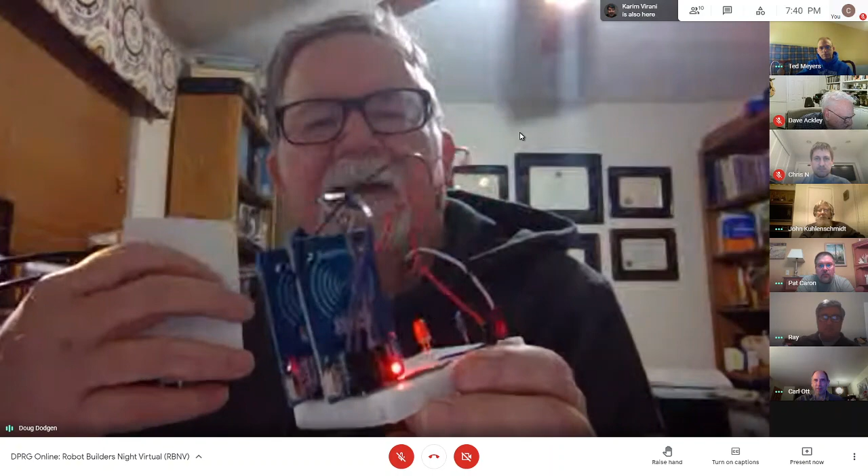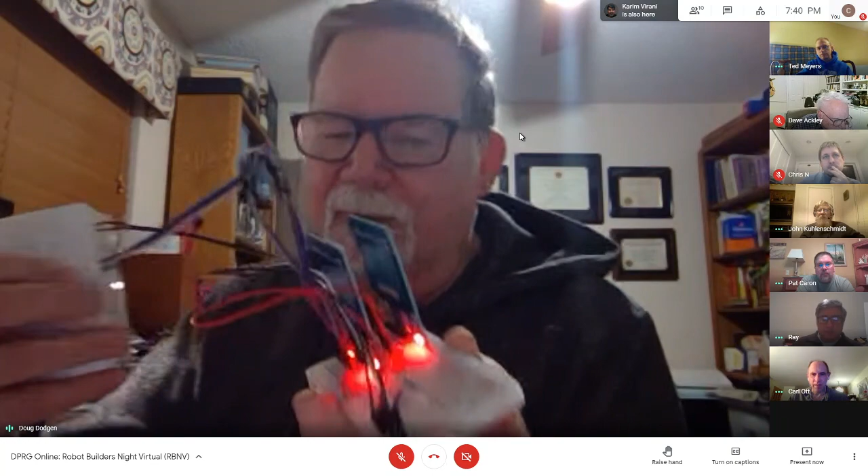Lead the way. Okay, well, I've been involved in a couple of projects this week. One is I've hooked up my Raspberry Pi to these RFID readers. I've got two of them in there, that's why it looks that way. I was checking to see if the one Pi could handle multiple readers, and it can. We're trying to come up with something for work with these. So you take these little dongles here, you touch them up to there, and you get to read. It's sort of like door openers if you've had that where you work. And so that's been an interesting thing. I broke it because I accidentally rewired something wrong, and I thought, oh my God, I can't get this to work. And then I got it wired back up, traced it down, found my wiring difficulty, and got it working again. So that was cool.

And the other thing I had to talk about is, let me present now real quick. I sent this document to the mail list, which was my first stab at command syntax for remote robot commands, what they send, what they ask for. So if you're in that mailing group, you will have seen that in the last day or so.

And last thing is Murray's not here, but thanks, Murray. I was looking at your code and it had really good examples of Python classes. Since I'm a Python neophyte, I'm trying to start writing some classes. So good examples, kudos. We'll tell you how we liked it when you get here. That's about it for me.

Unless somebody's got some questions about that. Is that more Python, kind of a combination of C and Python, or classes a traditional part of Python?

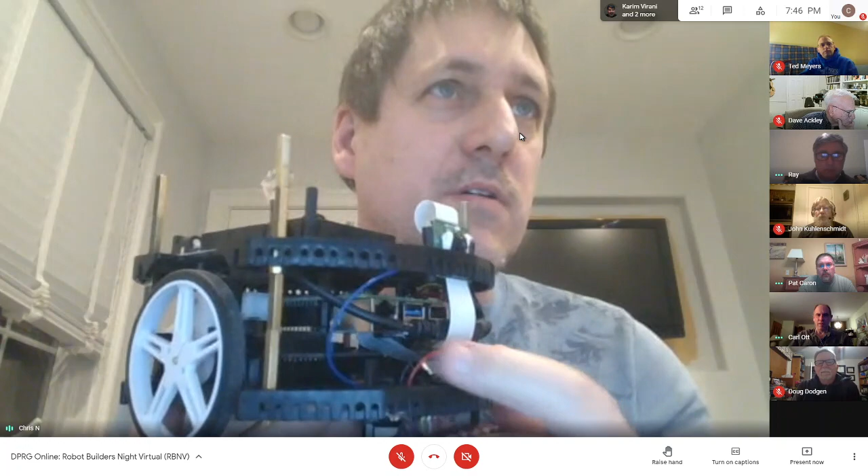So because Doug mentioned the document, I guess a couple comments on the telepresence robot. So one thing I did is I hooked up the Raspberry Pi camera to my Romi platform. You can see the ribbon cable. It kind of works out luckily in terms of where all the ribbon cable needs to go. You can see the Raspberry Pi is upside down in the Romi platform, but it all works out. Make a couple cuts in the Romi platform, so it's just sitting sort of halfway inside this upper deck here, inside a cut. So nothing fancy here.

So I did that so that I can tinker around with some video streaming, which many years ago I did on the Raspberry Pi, and I tried as best as I could to get some low latency video streaming going. So I dug up some of my old notes and tried some of those things, and then I tried a few other things. So I tried two approaches, mainly from the perspective of what kind of performance I can get. The question I'm trying to answer is, is it feasible to do interactive real-time control of the robot? Or are the latencies so much that it's just not going to work? That is the question I'm trying to answer.

And we know there's a lot of different ways to go about it. So the first way I tried is just really no frills, not using any particular framework, but just basically an SSH tunnel to connect my Raspberry Pi to the internet. For those of you who haven't done that before, it's kind of a useful thing to do sometimes. Let me just illustrate that real briefly. If I share my other screen. So ignore the left thing here for the moment. So what I've done on the Raspberry Pi, if you don't mind me scrolling up here for a second.

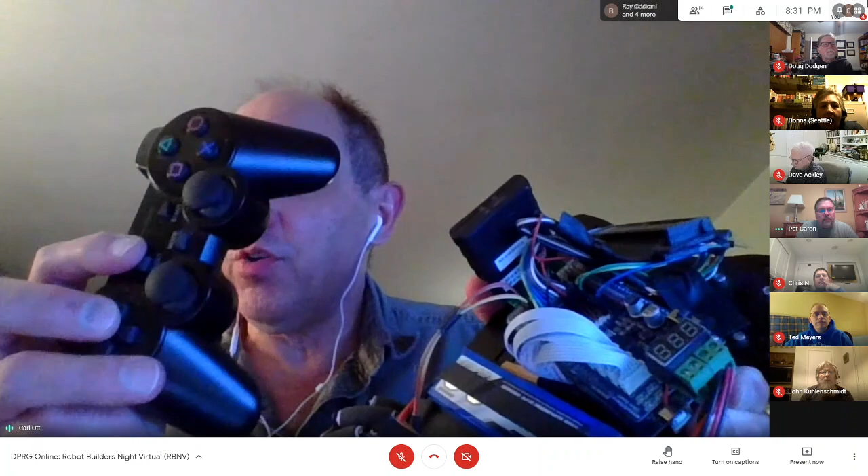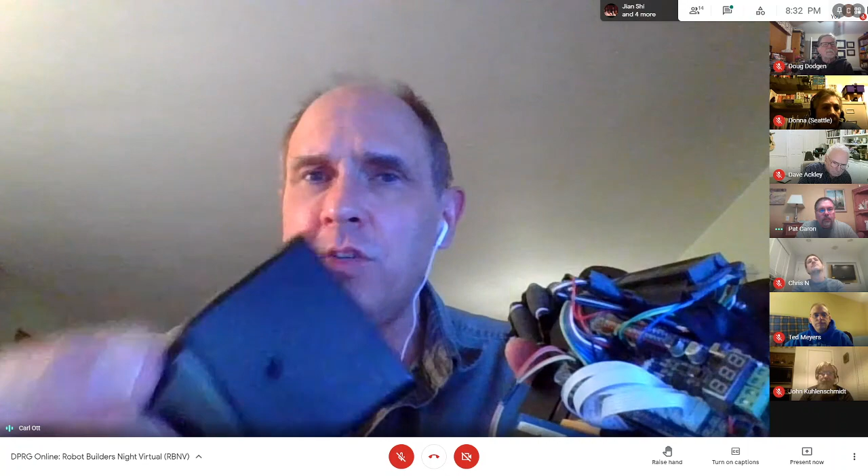Yes, so it's a PS2, right? Yeah. Now I've tended to buy them from Lynxmotion. Okay. They're a little more expensive, but they seem to be a little more robustly made than the cheap knockoffs you can get off of Alibaba. But they come with a PS2 dongle, and it's like $25.

You get the dongle, the interface card, and this guy. And I did have to spend some time to clean up the library that opened the common library that's available for this, but I've been very happy with the results once I got the library cleaned up.

How does it communicate from the dongle to whatever you're using, a Pi or an Arduino? It's a standard protocol, let me see. Is it SPI or I2C? I believe it's I2C actually, or SPI, it's one of those. I think it's more like SPI than I2C, but whatever it is, it's definitely not proprietary. I haven't been in that code for a year.

So it's something we could use fairly easily to port over to something else. Oh, if it's SPI, it would be easy enough. PS2 does use SPI, yeah, I just looked it up. If you want to see what's involved, I can send you a link to the repo I have, and you can see the upgraded library to interface with that. Okay, I can dig that out. Good, I'll check the chat for it.

Yeah, and so that's what I've been working on, and watching videos of everybody sending their robots out in the snow.

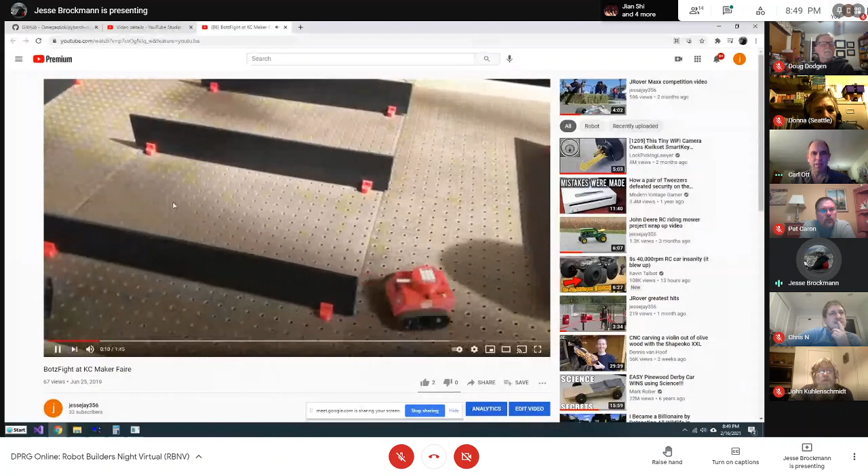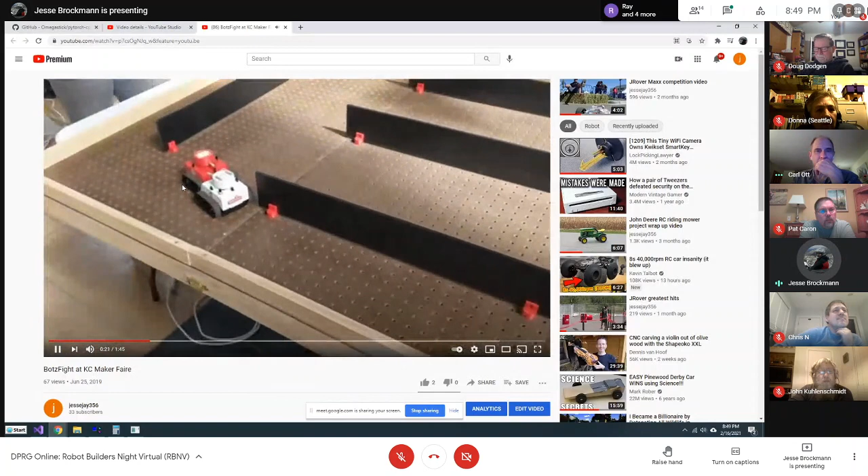So these are being driven by two teenagers, so they're actually much better at it than the general kids are. These are FIRST Robotics competitors, so I'm like, somebody who knows how to use a remote control, thank you.

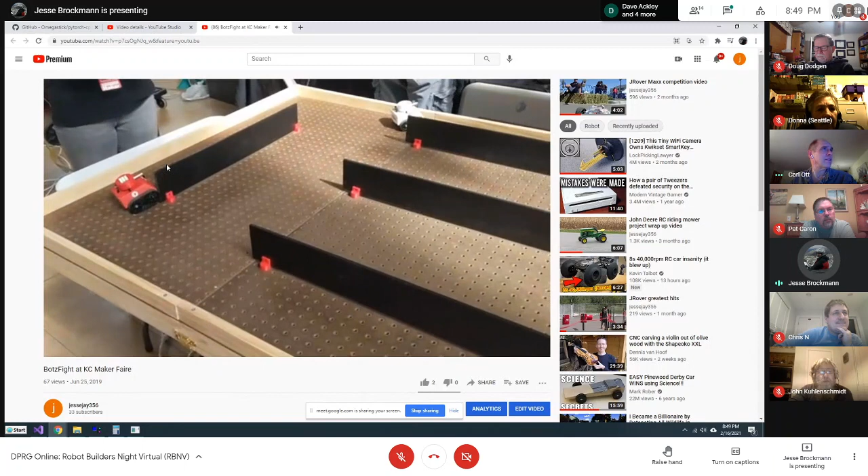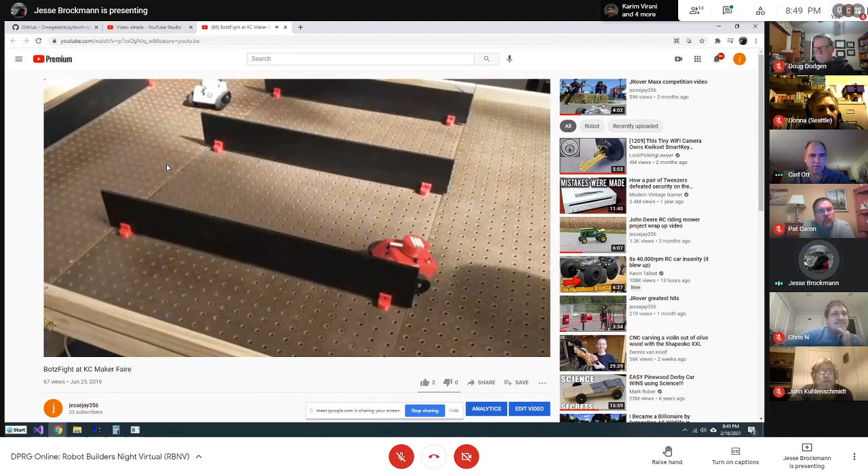So it uses infrared and has 4 infrared sensors, one in each corner of the tank, so it can detect from 360 degrees where the shot is coming from. It's using like a sharp protocol or something, so that you can have more than 2 tanks and you would know which tank hit you, and you could have things such as team play, stuff like that.

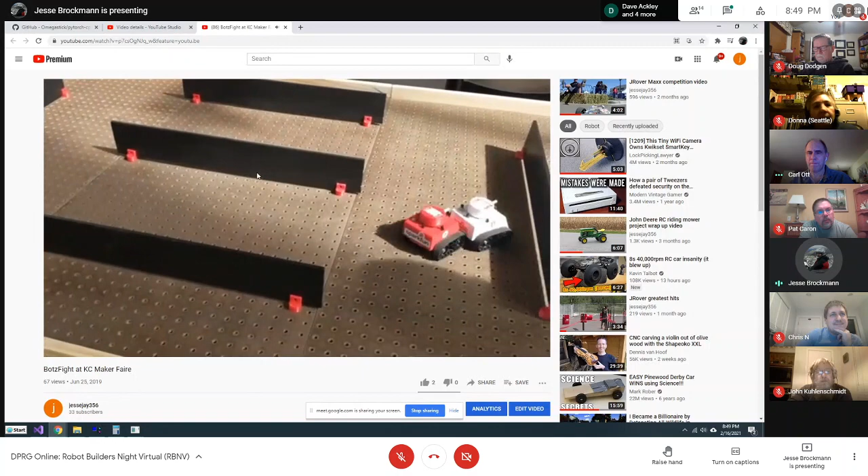Also, if you see a reflection of your own firing, it doesn't count that as a hit. But the funny thing is, the whole reason the walls are black is because even without that, the infrared is strong enough for reflections to be seen. So I have to paint the boards black in order for the shots not to be seen.

Also, for the same reason, the barrels had to be metal, because the infrared was actually transferring through the barrel. So even if you're alongside one another, it would still detect a hit. So I figured out the only way to fix it was to make the barrel metal.

I've really reduced the amount of LED power that I have, so I have a resistor in there to drop the voltage the LED sees, and even still, these have a range of 30 feet, so they've got plenty of room for infrared, like for sun interference and that.

I'm using maybe a hundredth of the LED power, because it's a really powerful LED. I got that one because it's a very narrow beam LED, so it's not like the normal ones on TV remotes where they have a really wide beam. This has got a very narrow beam, but as a result, it's very strong. But it works. Sounds like a fun game.

Yeah, I noticed the sharp receivers weren't shielded in any way, so do you care which receiver you hit with your beam? No, I don't care currently - I just did that so I can get the most coverage to make sure one sees the hit. If you put it on the side of the tank, there's a chance that a hit that should be valid might not be seen if I shield them too much.

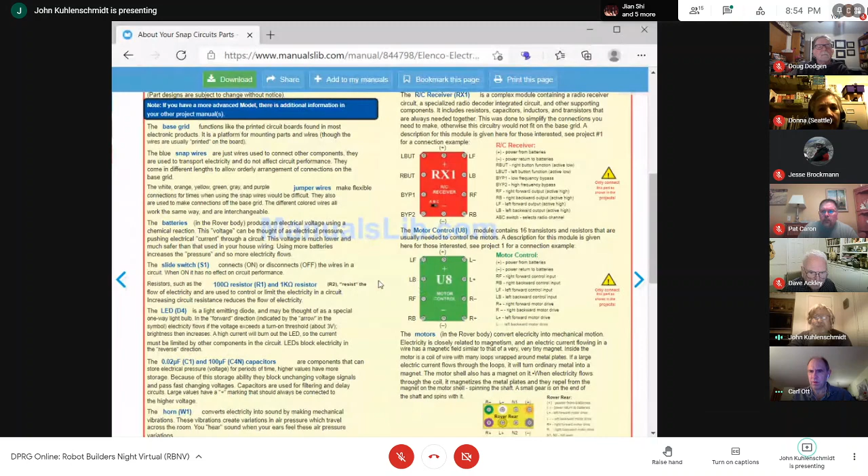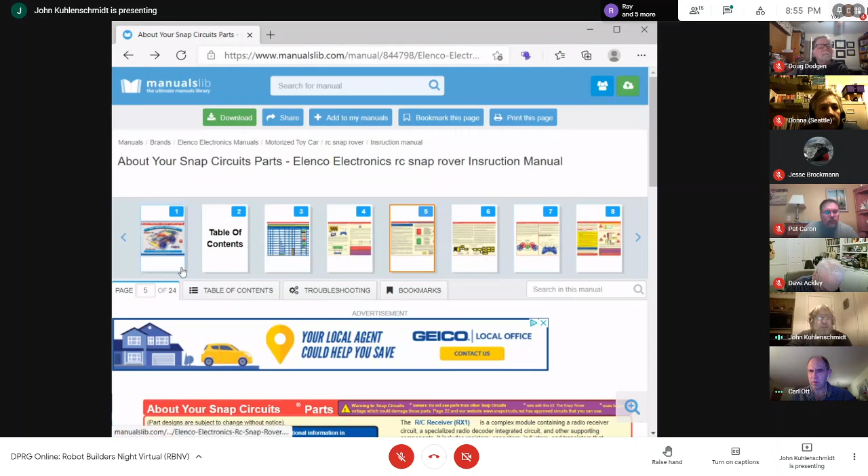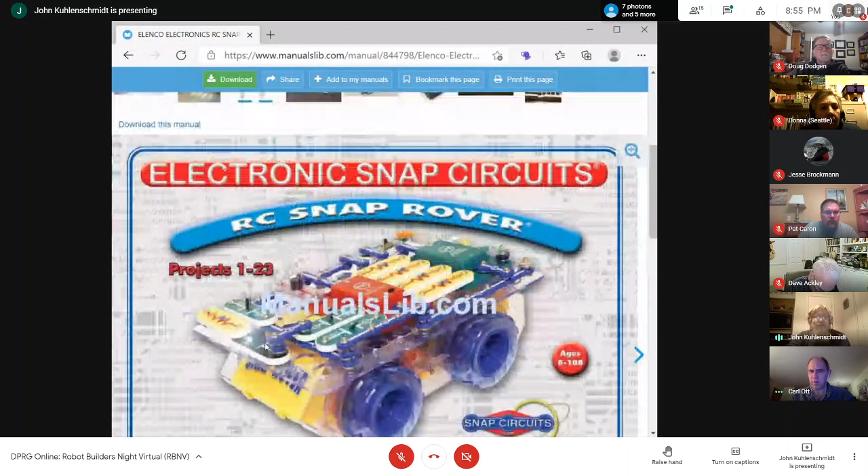So this I got a couple of years back and I haven't really played with it too much, and so I've misplaced the parts. But basically, you have the base and you have a thing on top that you snap different things onto. I was thinking of just getting rid of the top and plugging directly in.

So basically, let's go click along. You see you have little parts that you snap, but the key is on the back end — they have a remote light thing. Right in here on the back end is where you can plug your wires to the motors for the base. That's why I was saying about having a base and then putting stuff on top. I'm thinking of actually putting a Raspberry Pi on top of this.

So that's where I'm at. I just now need to dig out my Raspberry Pi amongst other things. So that's the thing I've done mostly this week.

John, did you buy that or 3D print it? I actually got this way back, several years back, over at Micro Center. And then I put it to the side because I was busy working on some other project, basically another RC car outdoor thing, I think, that year.

So as I was surfing the web the other week, I saw one of those projects where they use this for the base with that pole thing. In fact, last week I think I showed you all that website on Instructables, and they had the base — this is the base that they use. So I'm thinking it may work well.

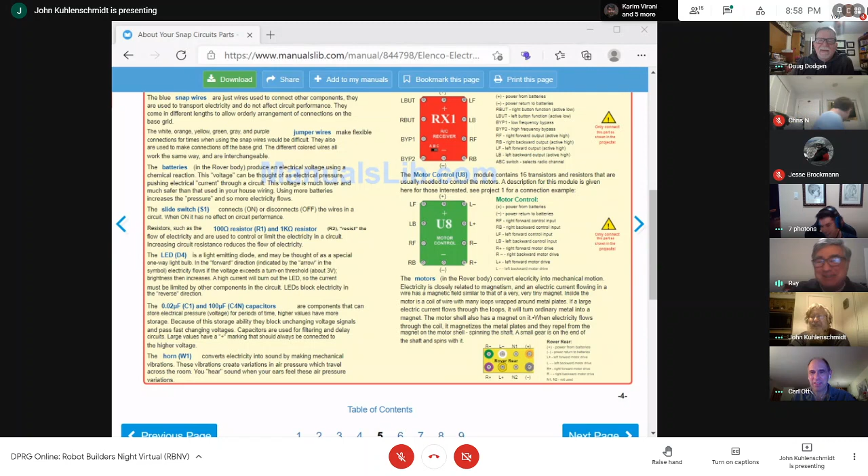I was thinking, what do you guys think of a robot that plays the violin? I thought I'd try that. I played the violin for 11 years, so I'd say good luck with that. Yeah, I used to too, but I don't know. I thought that would — well, the only other musical instrument we tried was a xylophone, and we made the mistake of bringing that up with us to Tyler, and it played for hours.

Yes, I was going to say xylophone or piano. Oh yeah, might be easier. But the piano might be it. You want a new idea? Yeah, probably.

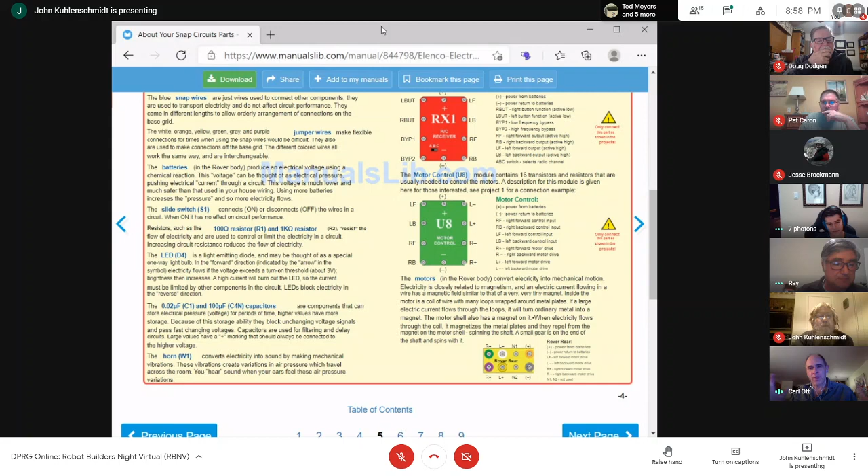There's a place, I think it's called House on the Rock, in Wisconsin. In one of the rooms, in several of the rooms, they have these mechanical orchestras, maybe 20s or 30s or 40s era, with a number of stringed instruments played by mechanical robots.

It's been done before, but you could do a cool thing with Arduinos and servos and stuff. House on the Rock, it's pretty amazing, up in Wisconsin. They have the world's biggest carousel in it.

I like the theater organ too because it's fanciful. Apparently the guy who did it had a habit of collecting things, so as you walk through his collection it takes all day to walk through his house and his warehouses of collections. And he did this.

What would he do? He would take a whole bunch of antiques, and then he would go make fake antiques, and mount them all in the same case. So you look at these muzzle-loaded handheld guns, gun after gun after gun, and then right beside that there's a rapid fire gun, like a Tommy gun in a handgun form. You'd have to scratch your head and think, this one looks real, that one looks real, but no, it can't be real. You just stand there staring at it, trying to figure out which one he's messing with you and which one's real.

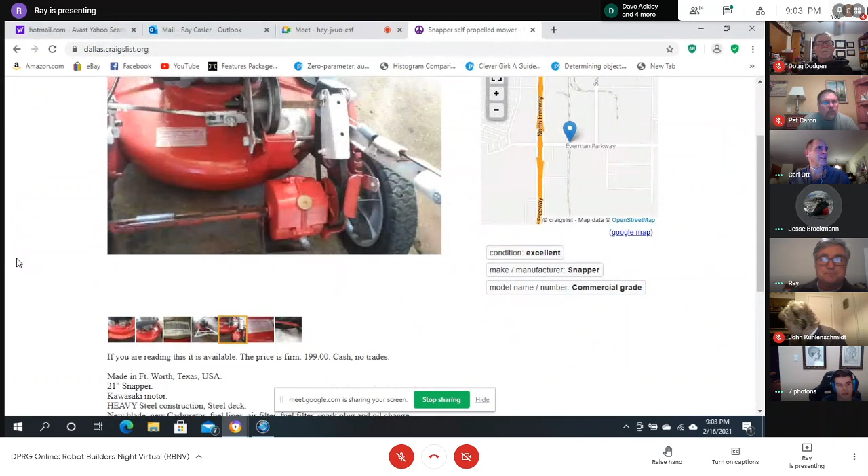I'm a big fan of the Prusas, and those are of course more expensive. They have the mini, which I believe is around 350, but there are plenty of printers in that price range. Okay, and they're resin printers? Yeah, oh no, SLA - I thought you meant something else.

Oh right, yeah. Have you looked at Micro Center? They had one for $200, 3.5 by 5. I actually have it, I forget the name offhand, but if you look at Micro Center you'll see it's a resin printer. Actually it does a pretty good job - the print is in front of me. But is it too big of a headache though? Because I remember with that... well, they have washable resin.

You can get the washable resin, it's $30. I want to say Torp, I forget exactly, but if you Google Micro Center and look there, I'd recommend that one. It's pretty straightforward, easy to use, and you don't have to deal with shipping because it's at Micro Center.

Only thing you have to deal with right now is the ice and snow. I'd wait until next week to trek out there to buy it. It's a $200 printer, but the drawback is its bed size is small. That's the one thing you'll run into, which is why at $200 I figured I could buy it, but I was toying with waiting for a bigger one later.

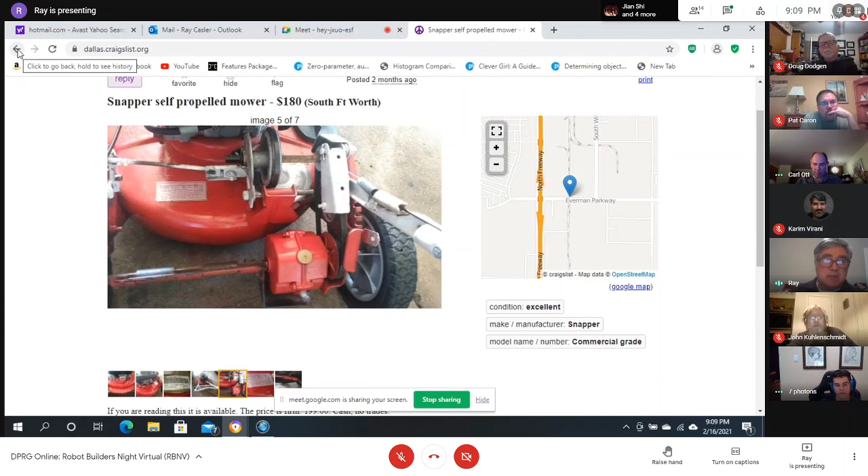This one was limited to only go forward, but if you extend it so it can go over on this side of the disc, it'll actually push it backwards. And they have larger ones of these - where is it? Yeah, like these, I was just kind of fascinated by this. This is a rear engine mower.

This was the balance. Most of the weight is going to be back here, the drive mechanism and the engines on the back side of the rear wheels. And it puts a lot less weight if this thing is unmanned, to be able to twist this rod, which is how you steer it. So basically you'd have a servo here and another servo pulling this lever back and forth, which controls direction and speed.

I'd have to stick a clamp on this thing because that's how you engage the lower bar. The safety mechanism is pretty easily defeated. But anyway, I was looking at those, kind of intrigued since I had one. It's kind of a mechanical means, as opposed to completely electronic, to be able to push a mower or automate one. That's kind of what I've been obsessed about.

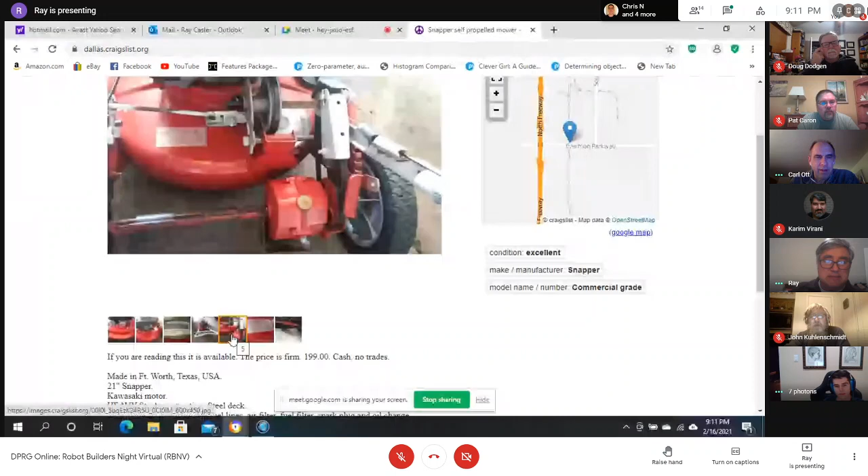I'm talking to the guys that are selling them, and they range in price, but some of the parts are interchangeable, and they still sell them. They're fairly expensive.

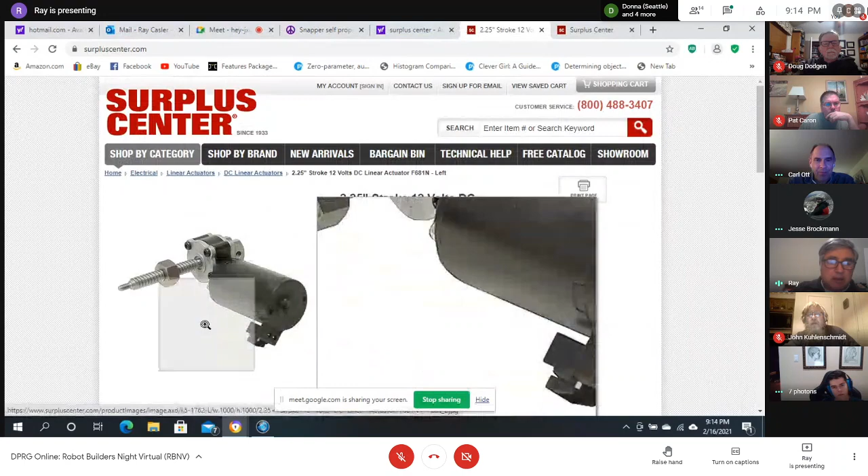Let's see, I've got to select the right one. Okay, this was the one that I've had. I got it at Tanner's a while ago. You can see the back of the motor is not accessible, but it actually comes with the nut, which a lot of them don't. It's $15. I haven't found it that cheap anywhere else.

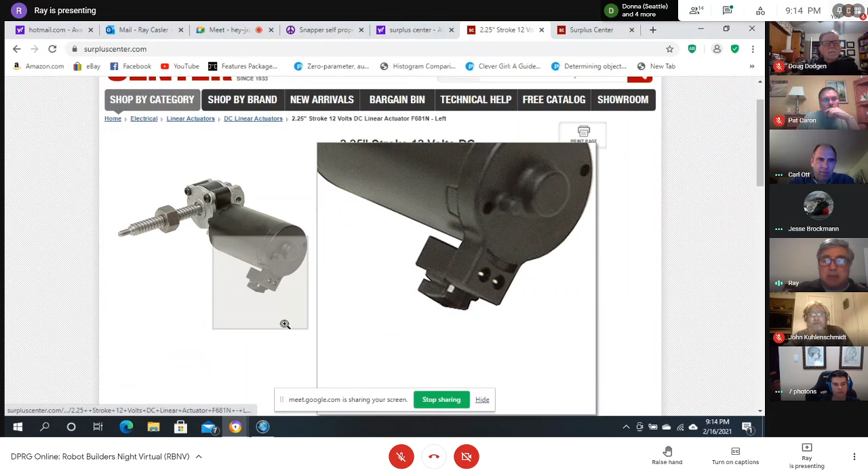But instead of using this as a lead screw, you could take the nut off and mount a wheel to the lead screw, and then it's more or less like a wiper motor. This has a worm and a worm gear, so it's got a pretty good reduction.

The other one actually has the back of the motor accessible. There's a little square opening in the shaft, and you put a piece of 1/8 bar in it and stick an encoder on the back of the motor.

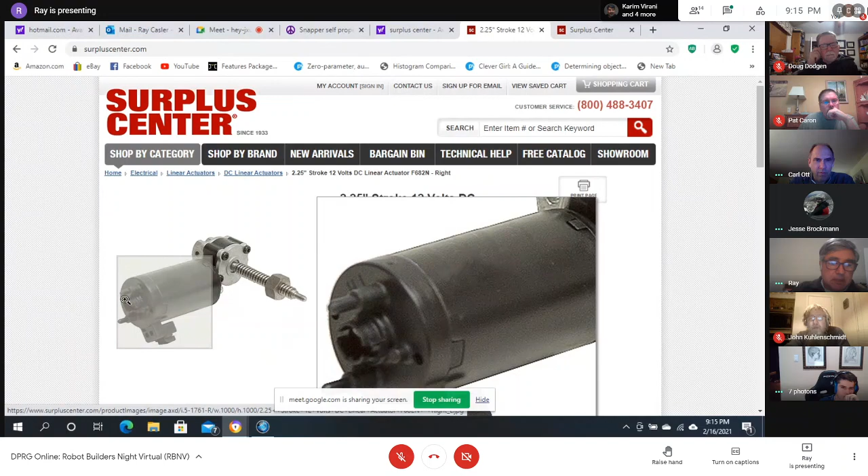They're meant, with the lead screw, to lift like several hundred pounds, for something like a seat height adjustment.

MPJA, it's another supplier, Marlin P. Jones and Associates, actually had, I think, a little bit more accurate information on it. They were saying the extension time is 6 seconds, but it's more like 2 seconds, so it's a lot faster than what they claim.

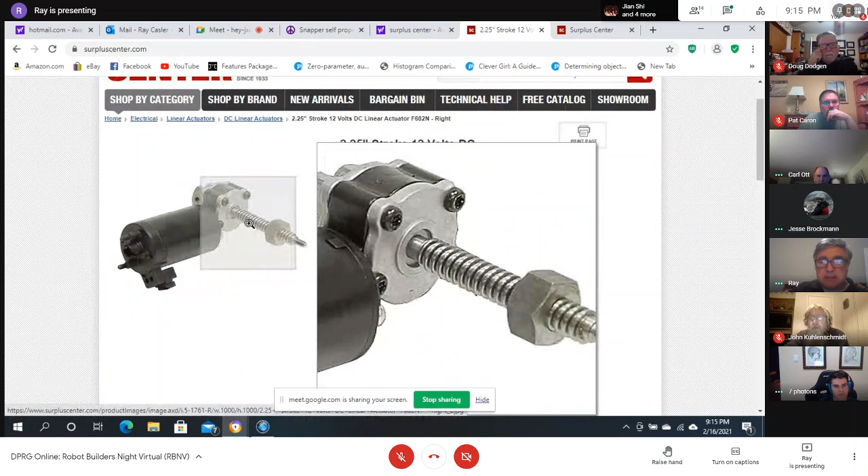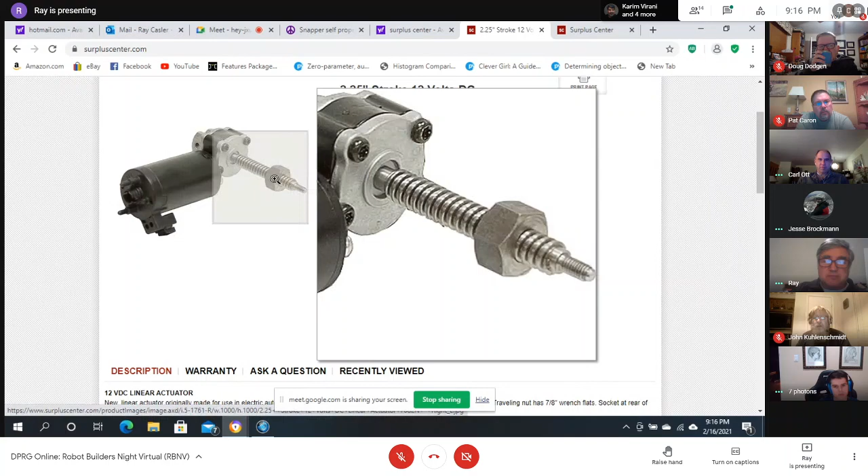At 12 volts, they were saying this rotates at like 178 revolutions per minute, which isn't bad. No load, they're saying 1.5 amps, which I think is about right. It was really meant for intermittent duty, but for most of the platforms that we have, you're not going to be pushing or pulling 300 pounds of load on this thing. So you should be able to use it much more than just intermittent duty.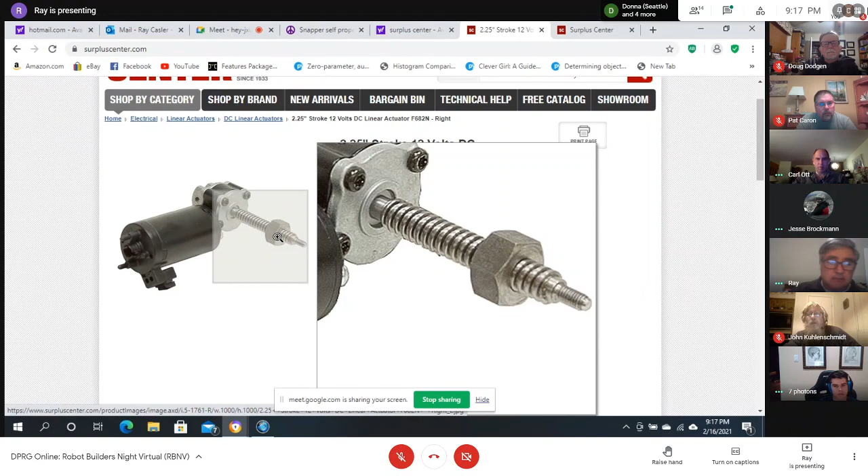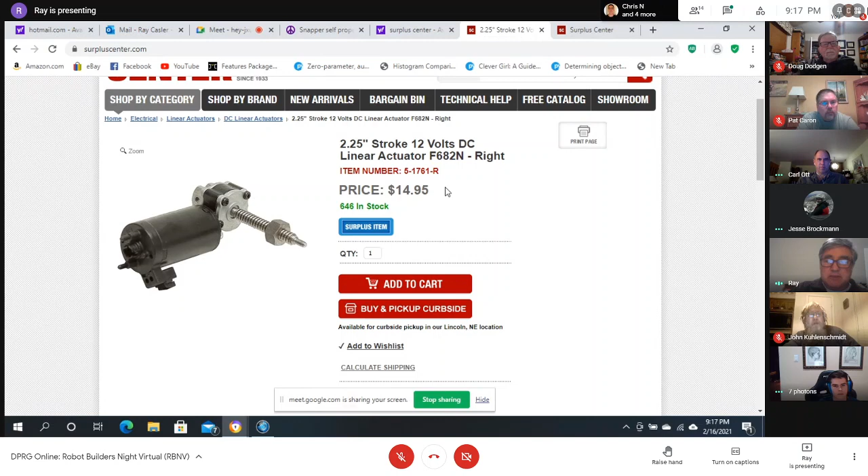This I think is 7/16 for the shaft. A lot of places sell this for like $20, and they don't have this nut that goes with it, which you can weld onto it. Stick a tube over the lead screw and have it push and pull if you're going to use it in linear actuator mode. Pat, you were looking for motors a while ago, and that's about the cheapest you'll ever see anything you can stick an encoder on with, something you can mount a wheel on. They have the left and right side versions of it.

Kind of like, I forget what they call those. They're the things that raise and lower a window, that motor. They have left and right versions of those, so you can see here they have left and right versions of these. These two I wouldn't get because they don't have access to the back of the motor, but I would get these two because they do.

And I've looked at those in the past for like a linear actuator or like a giant servo, something that you can move.

I've ordered a couple Pololu motors for my robot. I'm hoping they're going to be a little quieter, 37D motors. We'll see if they're a little quieter. Anyway, the price was a little better. Anybody else interested in it, go for it. I bought a bunch of stuff from them. They're pretty reputable, so I definitely recommend them.

To get that motor to Canada, that would end up being close to $40 Canadian. Really? Wow, shipping would be more than the cost of the motor. Yeah, that's what I hate. So what makes it so expensive? Is it customs and taxes, or is it literally the shipping cost?

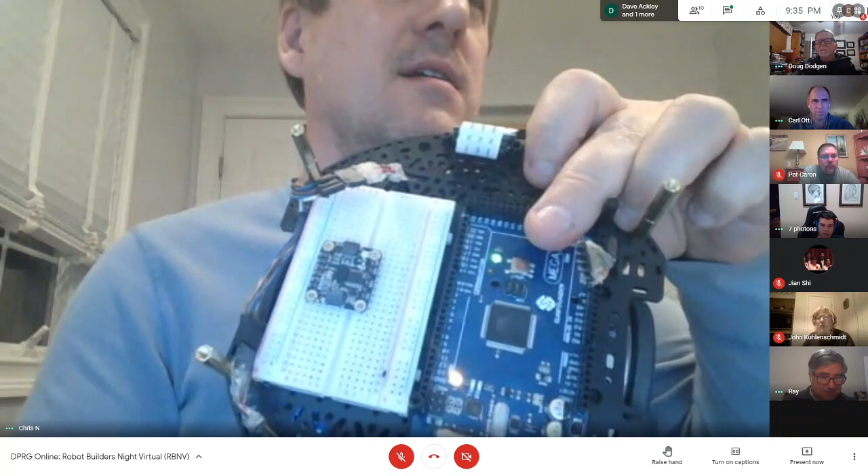That's the one shortcoming of the Romi, 3 wires right there, is that it doesn't have a lot of I/O. It's a shame. One thing I've done recently, I don't know if I showed it last time, but I put this middle deck on with an Arduino Mega - pick your favorite microcontroller. I had this one because the libraries for the BNO085 just work out of the box, boom boom boom, don't have to think much.

So I've been thinking a lot about how to interface something like the Mega, a topic we've talked about before. I'm just using the USB coming out of the Mega to go into the Pi, and I've had to do this on a couple of occasions now, even with the LiDAR. I had to butcher my USB cables, because if I want to be able to remove the deck, I gotta be able to disconnect.

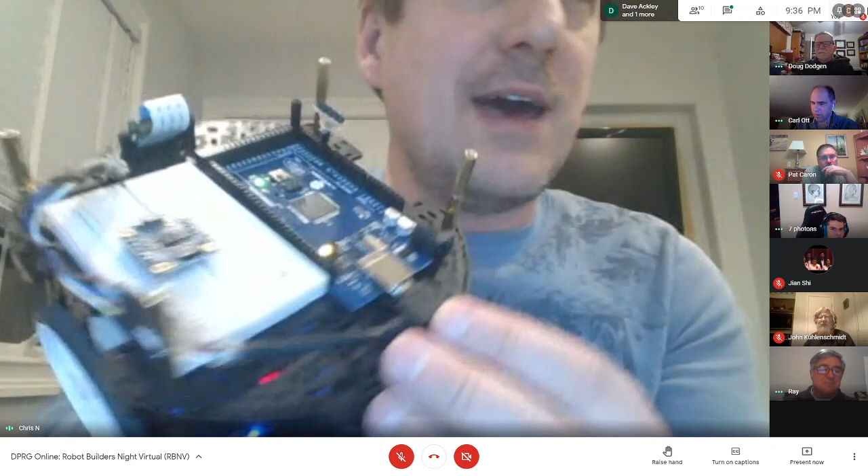So I find myself buying all kinds of right angle USB cables, and then I butcher them, I cut them, and then reconnect them. But as you can see, I go in between decks here, back down to the lower deck into the USB ports on the Pi, so I can remove the deck. It doesn't take me too long - a couple of things I have to disconnect, and then I can disassemble the deck. So it's a neat little platform.

An extra inch of space would have been nice in diameter, maybe, but I kind of bought it for the form factor in a sense. It's kind of small, compact, big enough to put stuff on.

Looking forward to you coming back next week with the second part of your AWS project. Yeah, so I'll fiddle around with that stuff a little more, and then we need to get back to some of my other things with the LiDAR. I still wanna - I was gonna say, in comparison to mine, yours is definitely decked out. I only have half a deck.